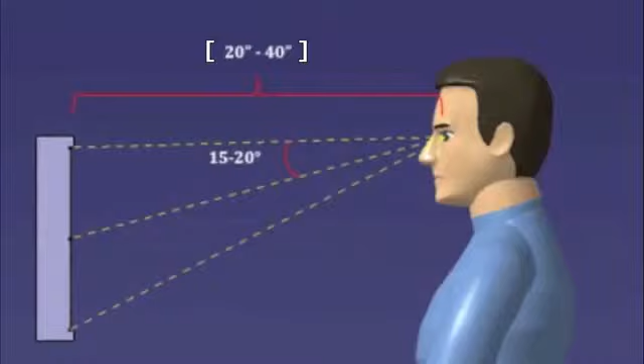The first consideration is that staring at a computer screen for extended periods can strain your eyes and cause aches in your head and neck. To avoid this, remember to keep the screen 20 to 40 inches away from your face, and make sure that it is at a distance that allows you to clearly see the entire screen without having to turn your head. Also, the top of the screen should be at or slightly below your horizontal line of sight, so that the entire height of the screen can be viewed without having to tilt your head up. In addition, the center of the screen should be located between 15 and 20 degrees below your horizontal line of sight.

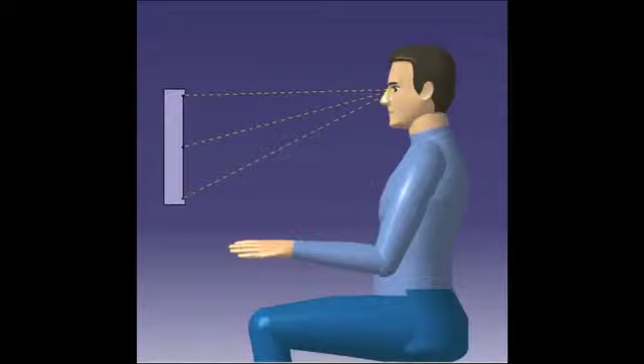Be sure that your chair and seating position allow you to sit straight with your back supported and perpendicular to the ground, and make sure that your forearms are supported comfortably and are roughly parallel to the ground. These posture recommendations will help prevent discomfort and injury that can result from sitting for extended periods.

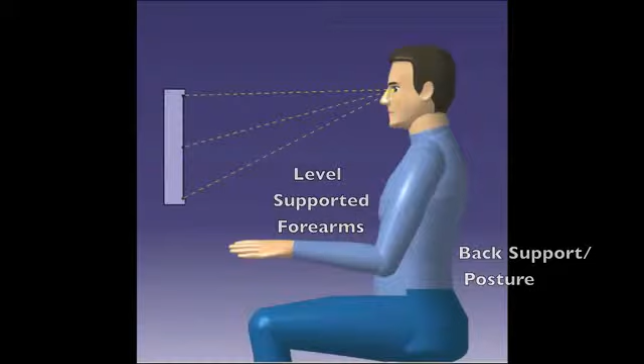Because working with CATIA mostly involves lots of use of the mouse, be sure to take small breaks every once in a while to give your hand and wrist a rest from the repetitive movements. These breaks can also provide a good time to stand up and look away from the screen, stretch your legs, or walk around.

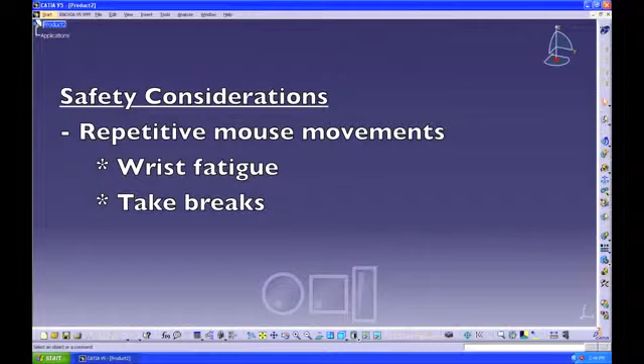There is one last consideration which concerns your mental health. It is not unheard of for CATIA to sometimes crash or do strange things at very inconvenient moments. Because of this, it is important to save your work often to avoid potentially losing hours and hours of hard work. This simple recommendation can save you a lot of grief and mental anguish.

For more information on safety recommendations regarding computers, you can visit OSHA's website and take a look at their page on computer workstations.

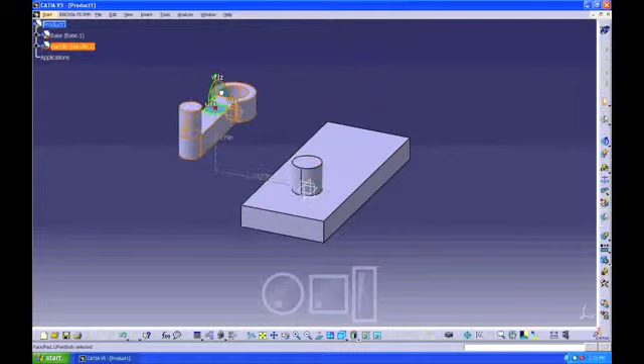Let's start with the basics. First, open CATIA and activate the DMU Kinematic Workbench. From here, you can create parts just as you would in the Assembly Design Workbench. In this example, we will import existing parts into the new product by selecting Insert Existing Component and choosing the necessary parts. The parts needed for this example are the handle and the base CATParts. Note that it is not necessary in this case to constrain all of the parts to each other, as they will become constrained as a mechanism is created.

Once all the parts are inserted into the product, the mechanism can be started. First, make sure the DMU Kinematics toolbar is enabled. If it is not enabled, then go to View, Toolbars, and select the DMU Kinematics toolbar. Next, click the tool with the anchor symbol to choose a fixed part that will not move in the mechanism.

Select New Mechanism and give the new mechanism a name. Now click on the part to be fixed. This is an important step, as all mechanisms must contain a fixed part. This step also creates a mechanism under Applications in the tree.

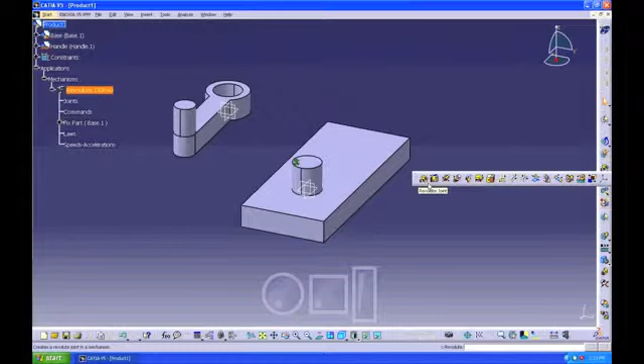With a fixed part within the mechanism, the first joint can now be created by expanding the Joint tool, located above the Fixed Part button, and selecting the type of joint desired. In this example, a revolute joint will be used.

When the revolute joint is selected, a new dialog box will pop up asking you to choose 2 lines and 2 planes. The line selected here will become the axis of the revolute joint and will create a coincidence constraint between the two parts. Select the axis of the peg on the base part and the axis of the hole in the handle part.

The planes will determine the location of the two parts in relation to each other. This also creates an offset constraint, which can be controlled in the offset option. The null offset option positions the parts so that the planes selected have an offset of 0. This is the option used for this example. Select the top faces of the handle and the base to be used as the planes.

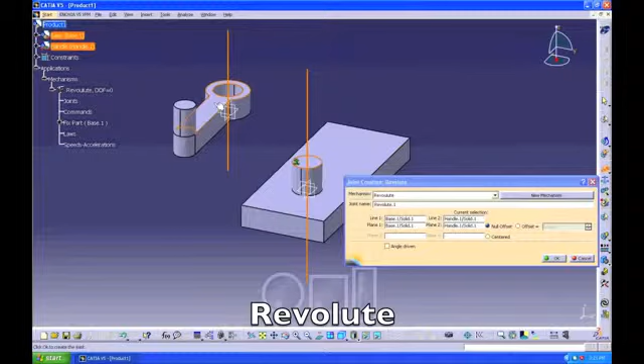Creating this joint has added a revolute joint to our mechanism in the tree. Inside that joint are the coincidence and offset constraints. These can now be edited by double-clicking, which gives the option to change the way the joint looks and behaves. For example, changing the value of the offset constraint changes the distance between the two parts once the mechanism is updated.

In the tree, we can also note that the number of degrees of freedom of the mechanism is displayed. In order for the mechanism to be simulated, the degrees of freedom, or DOF, must be equal to 0. When working with complex mechanisms with many parts and many joints, eliminating all degrees of freedom can sometimes be the trickiest part.

In this example, the way to eliminate our last degree of freedom is to add a driving command to our joint. To do this, double-click on the joint and check the box next to Angle Driven in the Joint Edition window. The limits of this new command can now be chosen in the Joint Limits section. The default here is from -360 degrees to +360 degrees, which means the joint will have a range of motion of 2 full revolutions.

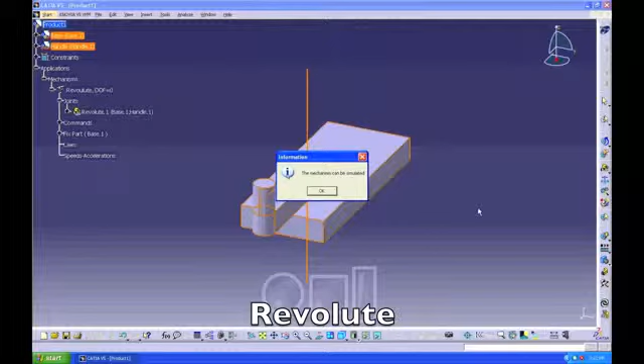Click OK, and CATIA will announce that the mechanism can now be simulated. Also, a command was created in the tree, and the DOF is now equal to 0.

Now the mechanism can be simulated to make sure it works the way it was intended. First, click on the Simulation with Commands tool to open the simulation window. With the Immediate option selected, you can drag the slider left and right to change the driven angle command and rotate the revolute joint.

If the simulation option is changed to On Request, the angle can be changed, but the joint will not move until the play button is pressed. The mechanism can also be moved by clicking and dragging on the actual model.

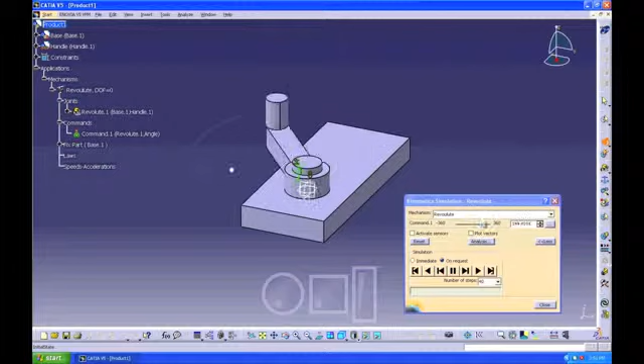Before closing this window, it is a good idea to click the Reset button to reset the mechanism to the state it was in when the window was first opened.

Now that the mechanism has been tested and it is clear that it works as intended, a real simulation can be created that can be saved and replayed. First, click the Simulation tool on the left and select the mechanism to be simulated. This brings up an Edit Simulation window and a Kinematic Simulation window.

This brings up an Edit Simulation window and a Kinematic Simulation window. The simulation will be created based on frames that are added by pressing the Insert button, and can be deleted or modified using the other buttons in the same row.

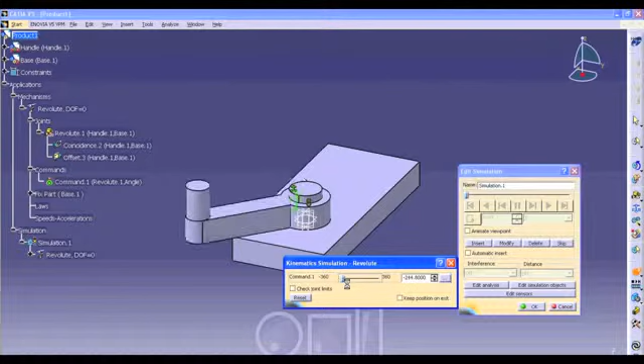The position of the mechanism at each frame creates an animation of the mechanism in action when played back. By default, one frame is added to the simulation from the beginning. To add another, move the mechanism using the slider in the Kinematic Simulation window, and then insert a new frame by clicking Insert.

Next, change the interpolation step size to 0.01. This determines the size of each step created between the frames. The lower the number, the slower and smoother the animation will be.

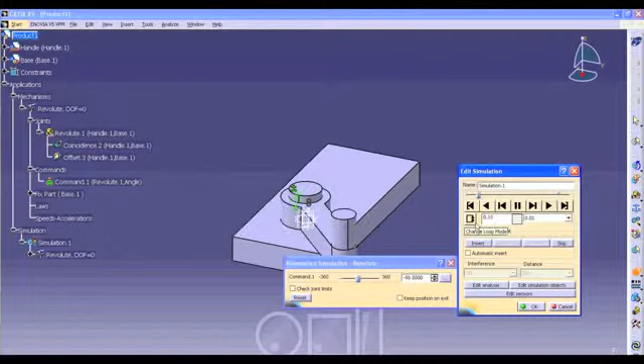There is also a loop option, which can continuously loop the simulation, either skipping back to the first frame or by reversing the direction of the simulation once it reaches the end.

At this point, the simulation can be changed and the frames can be added or removed to create the desired animation. When the simulation is complete, click OK, and a simulation is created in the tree.

The simulation can be viewed and edited by double-clicking it on the tree.

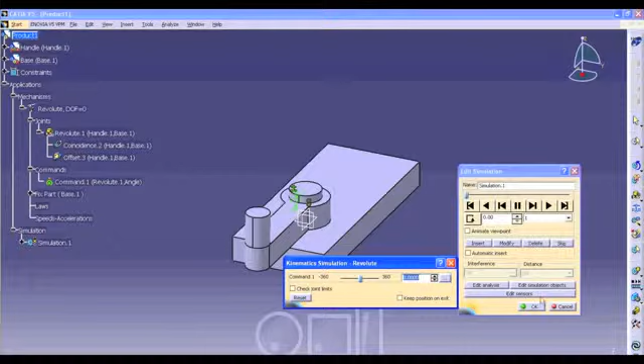Next, if we compile the simulation, it will create a replay, which will save the simulation so it can be played as it currently is.

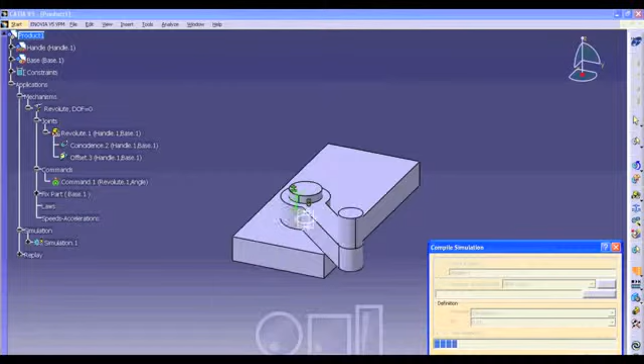First, select the Compile Simulation tool under the Normal Simulation tool. Give the replay a name, select the simulation to be compiled, and then select the desired time step, which is the same as the interpolation step size from before. Now, click OK and the simulation will be compiled, and a replay is created in the tree.

Now, by double-clicking on the replay, it can be viewed using the same navigation buttons from before. The same loop options are also available, and the speed can be increased by 2, 5, or 10 times the original speed.

Now, no matter what is changed in the simulation or the mechanism or the model, this replay of the simulation will always be there to view and will not change.

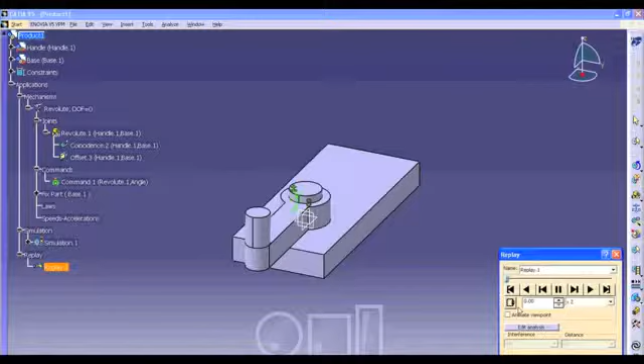Congratulations! You have now successfully created and simulated an assembly mechanism in CATIA. At this point, be sure to save the product file.

Now let's take a look at some other useful joints that are commonly used in creating assembly mechanisms.

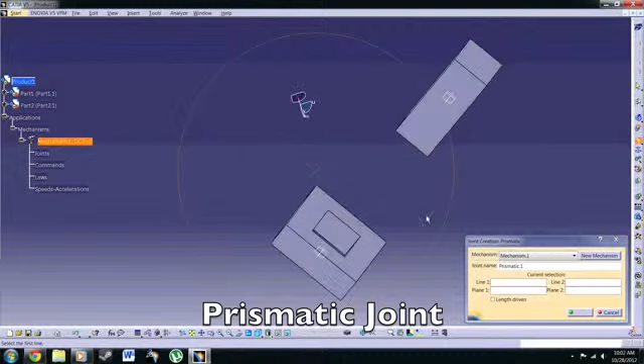A prismatic joint is similar to a revolute joint in that it requires the user to select two lines and two planes. The major difference is that the prismatic joint involves a linear movement in one direction between the two parts. Therefore, it uses a length-driven command instead of an angle-driven command.

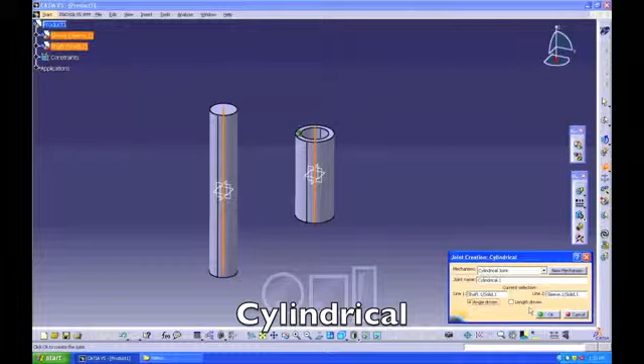A cylindrical joint is a combination of a revolute joint and a prismatic joint, which gives the user the choice to create a command that is either angle-driven, length-driven, or both. The prismatic and revolute joints it uses can be created on the fly or can be selected from existing joints.

A rigid joint simulates the act of physically securing two parts together. This way, when one part moves, the other part moves with it.

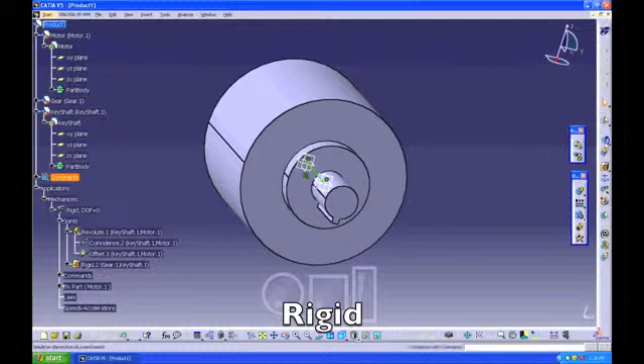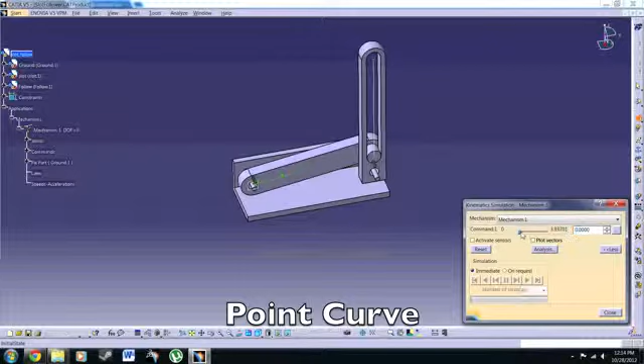A point curve joint is used to guide a part to follow a curve. When creating this joint, make sure that the part contains a point that lies on the curve to be followed. This example shows a mechanism that uses two revolute joints and one point curve joint.

A gear joint is a combination of two revolute joints, one of which is angle-driven, and which are connected by a gear ratio that is selected during the creation of the joint.

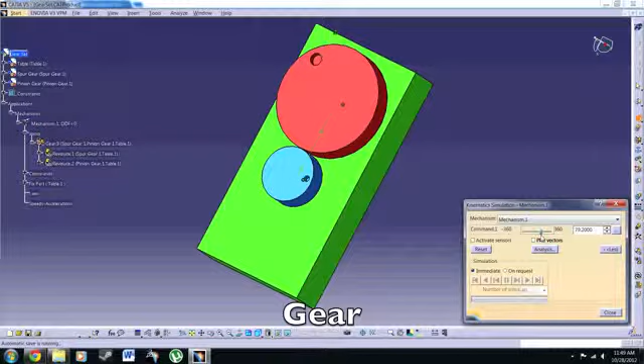A rack joint is a combination of a revolute joint and a prismatic joint. The rack joint can be angle-driven by the revolute or length-driven by the prismatic.

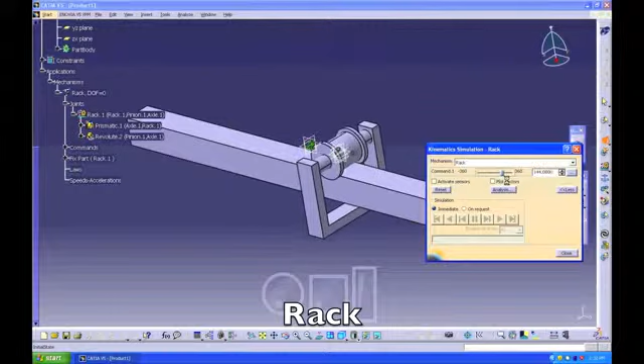Like the name implies, a cable joint can be used to simulate a cable or pulley type system. It involves creating two prismatic joints with a single command associated with one of the joints, which will drive the cable.